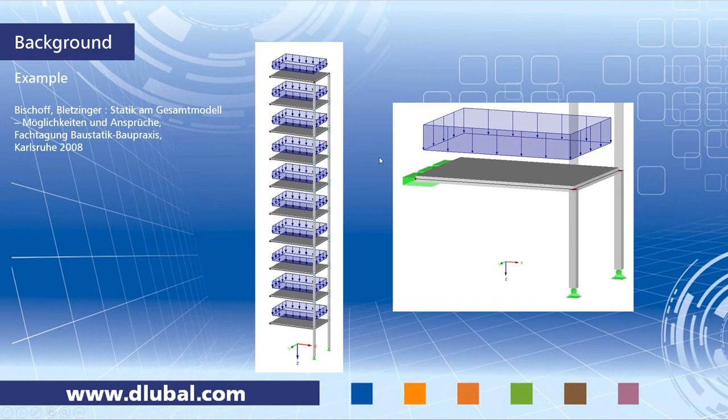So if you would calculate this model in RFEM as the whole model, it will look like the left graphic, and there you can see construction stages are not taken into account. So there's just one calculation for the whole building. All the 10 stories are calculated in just one step with all the 10 surface loads. And you can see in the graphic of deformations that the deformations are increasing to the top of the building. That means we have the minimum deformation on the bottom and a maximum on the top in the red color. And this is like a hang-up effect of the ceiling surfaces. So there's an addition of deformation from the bottom to the top, and you will find the maximum bending moment and the maximum deformation on top.

The question is: is that calculation representing the real behavior of the build-up process or the real behavior of the structure? And it is clear that the whole building, the 10 stories, are not built just in one second or one step. They will be built step by step. That means first there will be, of course, the first story, then the next one, and so on.

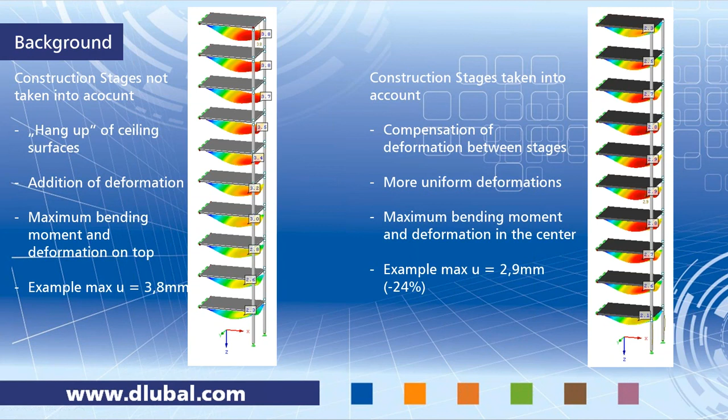What does it mean? For example, you have a temporary load like a crane or something like this in stage number 2, representing some construction workers or a construction truck maybe, and you want to inspect a combination of different positions of this load. So this is what you can do with temporary loads, and these are acting only in the stage and not in a following stage. These temporary loads are calculated by first order, and that's why you can combine them as a result combination in a particular stage.

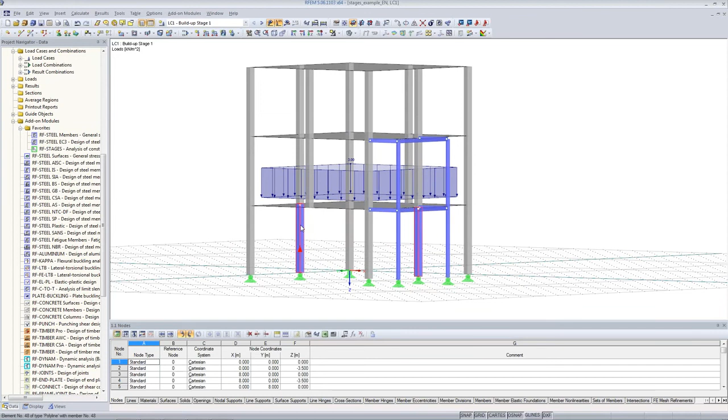So with these features, we want to move over to RFEM, and there I've already created a small model for today's webinar. We have a small building, concrete and steel. We have 3 surfaces, a lot of concrete columns over there, and we also have temporary columns over there, these two steel columns and a small temporary platform. I already created the load cases. It means we have build-up loads for stage 1, stage 2, and stage 3.

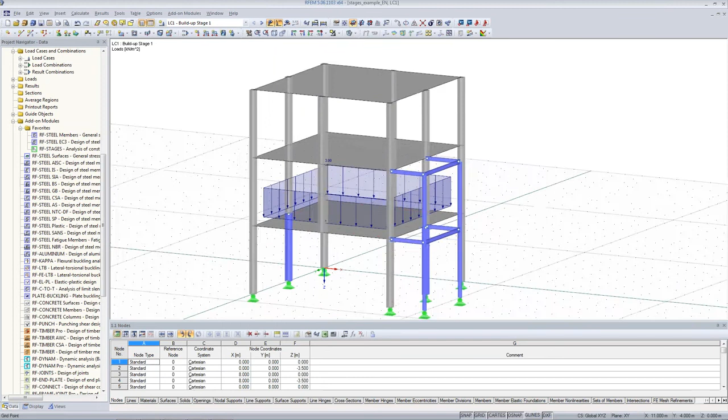And as you can see, it's an important fact that you have to split up the loads for the stages calculation. So I want to prepare 3 stages. That means the first stage, the bottom of the building, then the next stage will be added in stage 2, and then the final stage where I want to remove the temporary frame over there. And in the second stage, I will already remove these 2 temporary columns. So important is to split up the loads. This is built up for stage 1, stage 2, and stage 3.

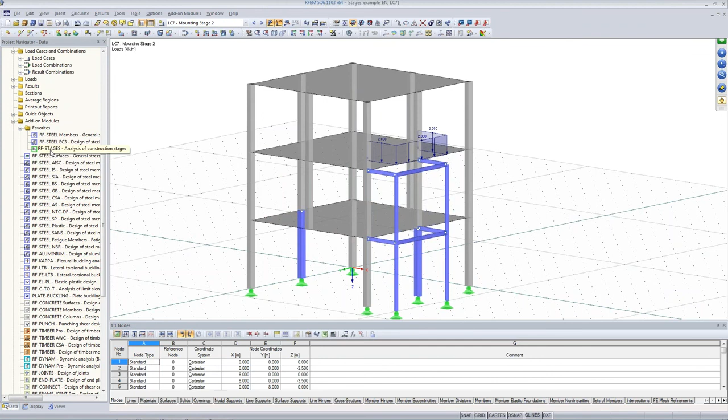And we also have mounting loads. These are the temporary loads on our platform. So right now we want to start with the module RF-Stages.

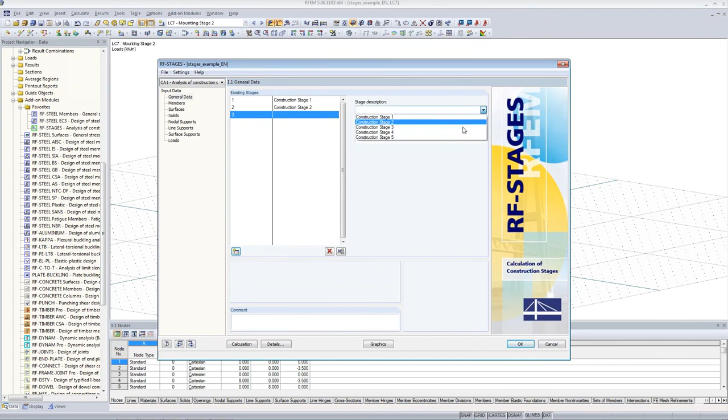By double-clicking on this module, you will find general data, and it is just about defining the stages. So we have 3 stages there. You can write down a description, or you can use a template like construction stage 1, 2, and stage 3. And then we can go on to the members dialog, where you have to add the members which will be added, removed or modified in the particular stage.

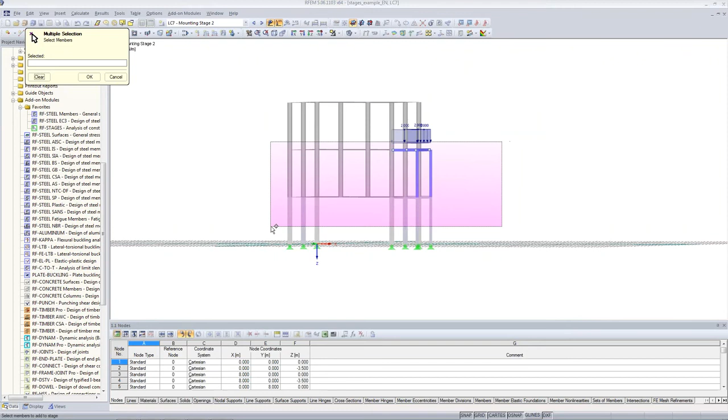In stage 1, of course, you cannot modify or remove something because there's no stage before stage 1. So we will start to add something, and these are all the columns there and the 3 horizontal steel beams. Okay. In the next stage, we want to add not these columns, but these members. Okay. And we want to remove the 2 temporary columns at the bottom of the building.

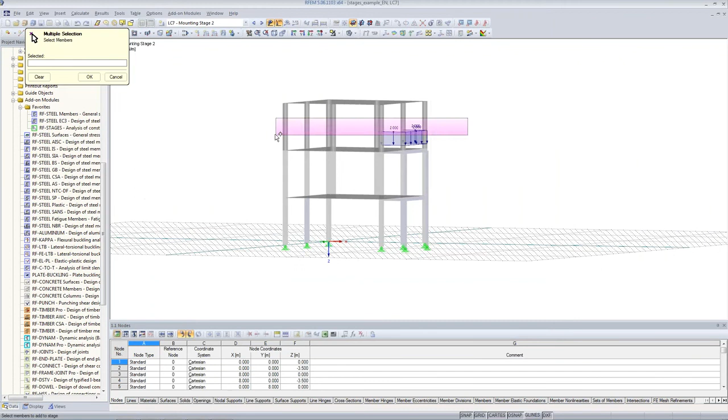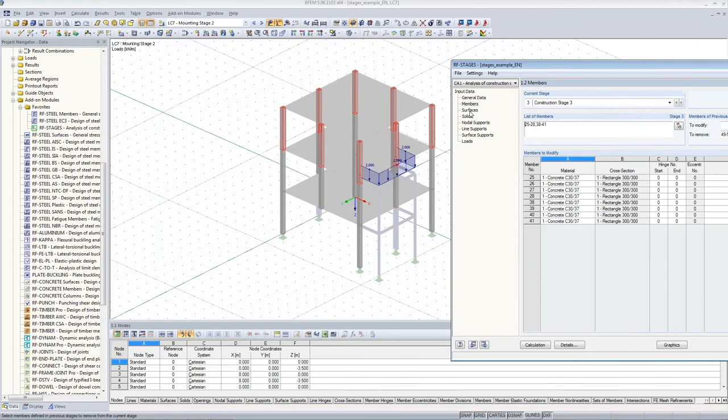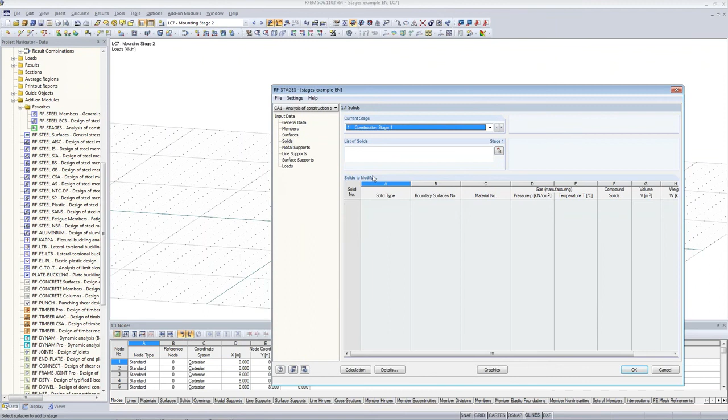Okay. And in the last stage, we build up the concrete columns in the 3rd floor and remove the temporary frame there. So as you can see in the graphic, you can follow the selection in the RFEM background. So construction stage 1, 2, and 3. Now we want to add the surfaces. That's quite easy. Stage 1, surface 1, stage 2, surface number 2. And in the last stage, there's the roof surface.

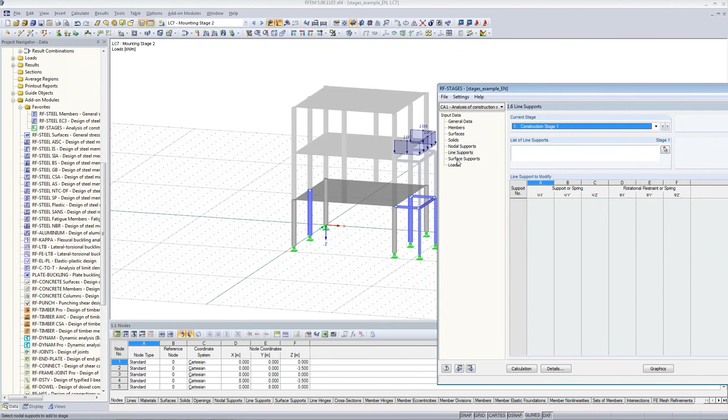Okay. We don't have any solids in this model, so we can go on to the nodal supports, and we will just select all of them. We don't have to remove the nodal supports because these temporary columns will be removed, so there will be no load left on this one, and we can just leave it as it is for all the stages. We don't have any line supports or surface supports, so we can just go on to the loads.

In RF-Stages, it is possible, as you can see in this mask, to add permanent or temporary loads. The permanent loads are, for example, self-weight, or any kind of load case or load combination which should be taken into account in every stage. So it is a constant load for all the stages, like build-up loads and live loads. In this example, I created load combinations for the several stages, and you can also use load cases or load combinations, or you can even use them together.

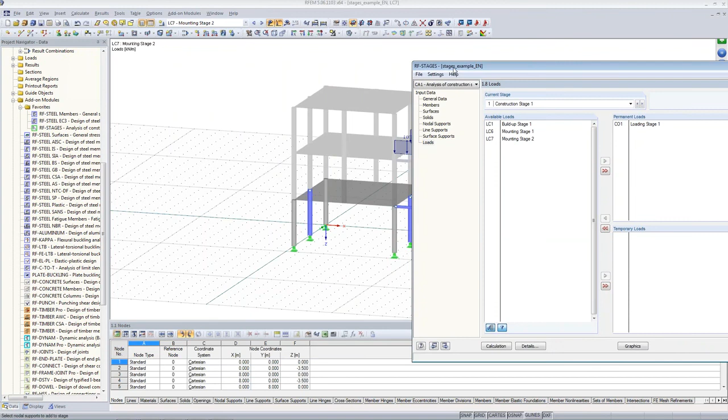So in stage 1, I prepared load combination number 1, so I can add this there. Stage 2, loading for stage 2 as a combination, and stage number 3. What about the self-weight? Self-weight is a special type of load in RF-Stages. You can add the self-weight as a separate load case for every stage. So in this example, I could create 3 load cases of self-weight, but this is quite time-consuming.

In this combination there is no self-weight active because we can use the assign self-weight to all stages checkbox there, and because I used partial safety factors in the load combinations, I want to change the self-weight factor to 1.35, for example. Okay. On the lower left side, you can find the alignment of new elements, like initial position, which is exactly the same as in RFEM, or tangential position, which is the position of a new element in relation to the last stage before, which might be more important for bridge construction.

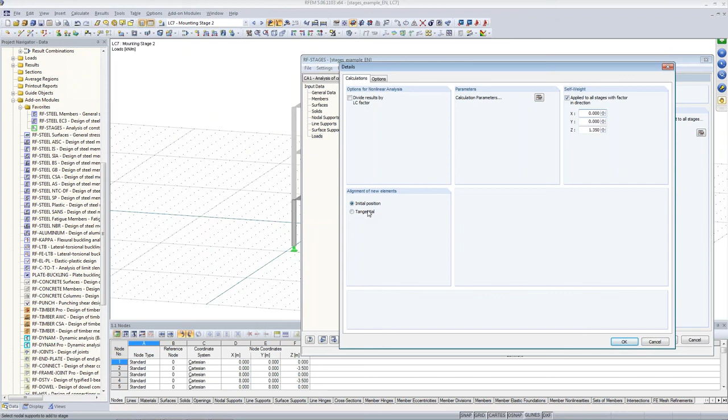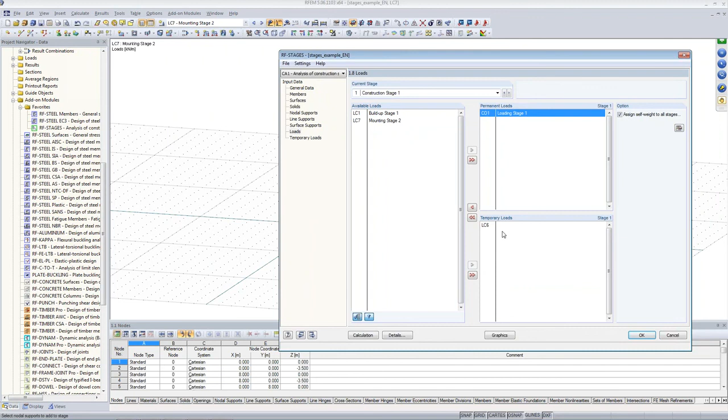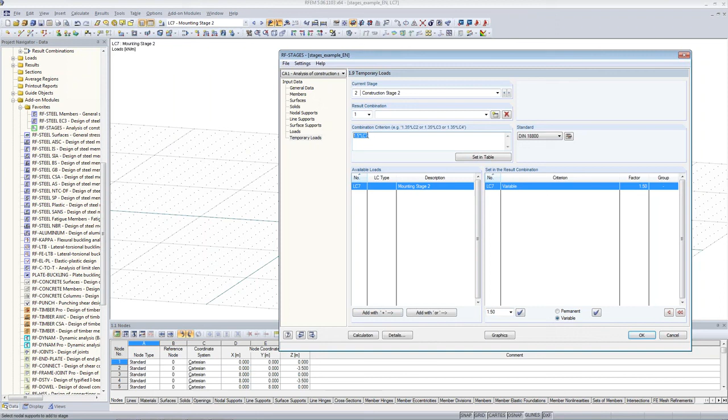Okay. What else? We have 2 mounting load cases there, and these should act only in the separate stage. So I will add load case number 6, mounting stage 1, as a temporary load case for stage 1, and mounting stage 2 as a temporary load case in the second construction stage. To combine more than one load case, you could use temporary loads, but in our example we have just one mounting load case, so I will just add it with a factor of 1.5, for example, for construction stage 1, and then the next one for stage 2 also with a factor of 1.5, load case 7.

And with these definitions, we can start the calculation. And you can see that there's a separate calculation for each construction stage.

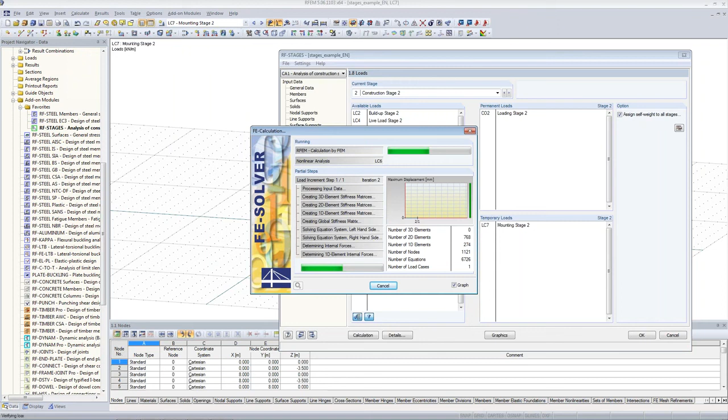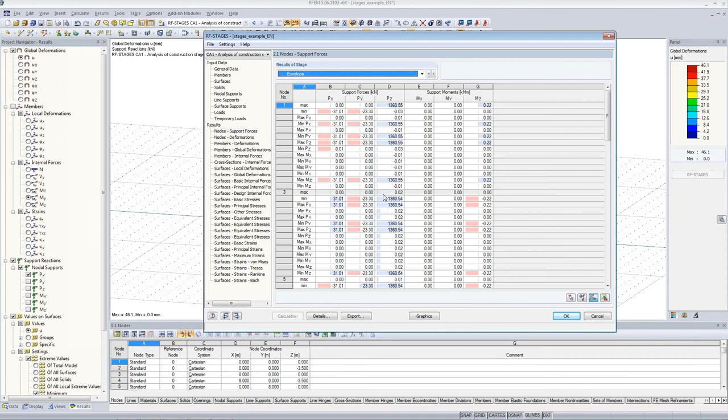And after that, all these results are combined together as an envelope of all construction stages. So you can check the results like in RFEM in several tables, results, Nodal Supports, for example. Construction stage 1, you can check the temporary load cases and an envelope of all the construction stages, including temporary construction stages.

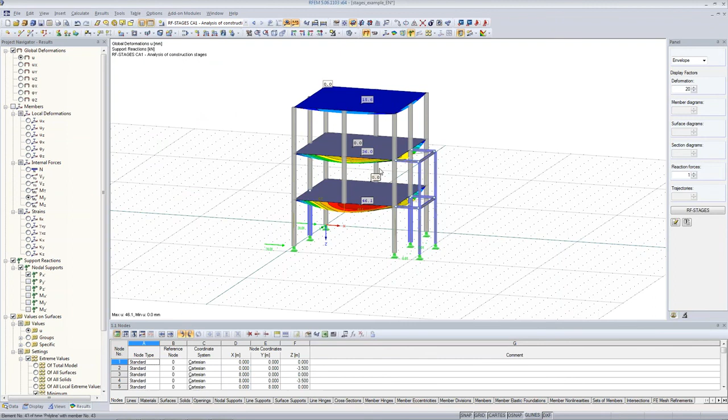So right now I could do just nothing with these results. I can do no design because they are just in the module, and to export them to RFEM, you can easily click on the export button, exit the module, and you will get result combinations in RFEM. Right now we can just stay in the module and check the results in the graphic.

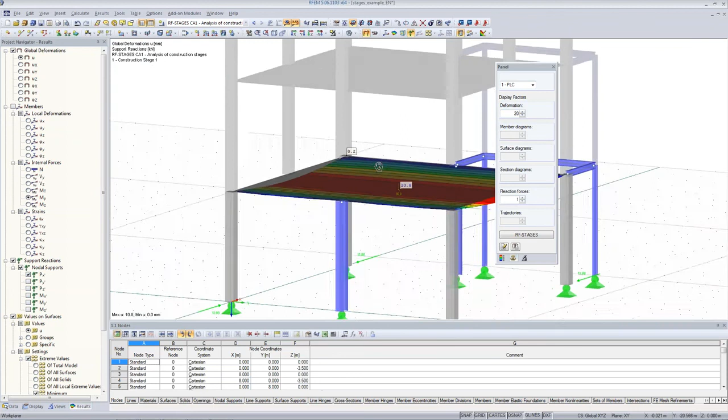So on the right side you'll find a panel with the envelope, or you can take a look at one PLC, which is the permanent load case, permanent loads for stage 1. We can take a closer look to the structure over there, and you can see that there was a temporary steel column, and there are no deformations over there. In the next stage, this column is removed. It's in the background right now. You cannot select anything, and you can see a deformation which is on the ceiling in the second stage.

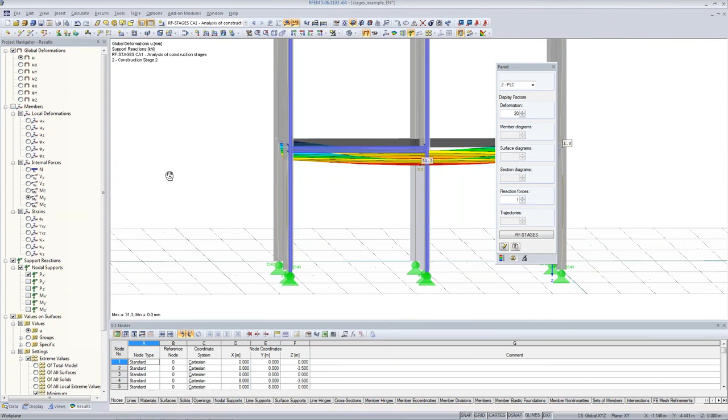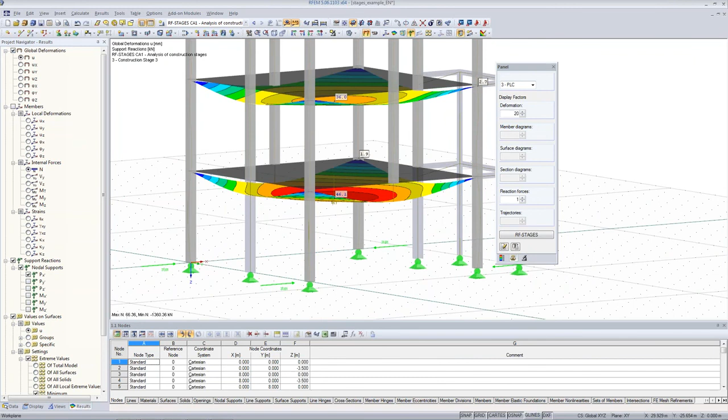You can check the normal forces in the temporary frame over there, and in the third stage you can see that also this frame is in the background. It's grayed out, so there's nothing. It's removed in the last stage, and this is like the final result or final stage. Yeah.

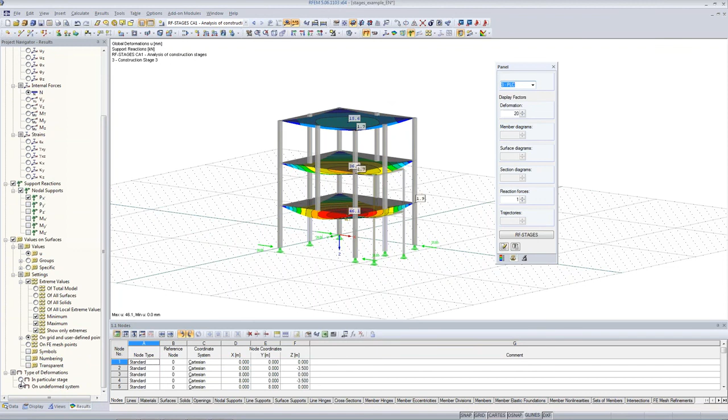I also talked about a feature to show the type of deformation, that means an undeformed system or in the particular stage. So if I want to know what size of deformation is in the last stage in the structure, I can change this option to in particular stage, and you can see that in the last stage you get an additional deformation of 15.6 millimeters on the structure,

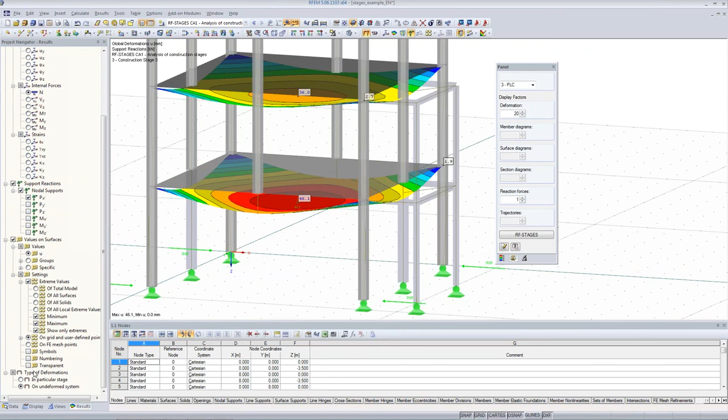and on undeformed system it's 46.1 for the first floor. That means the total deformation of this surface is about 5 centimeters, but in the particular stage, in the last stage, it is just 15 millimeters.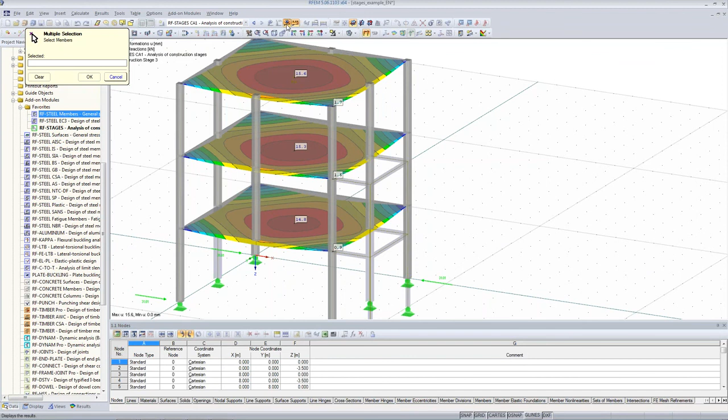All right. Right now I can do a small design with these result combinations of RF-STAGES, for example, in steel members module. And you can use these combinations over there, or you can just use the envelope to get a small elastic stress design, for example, for these columns. First of all, I have to switch off the partial view mode to get these columns working. Cancel. Okay. Incorrect.

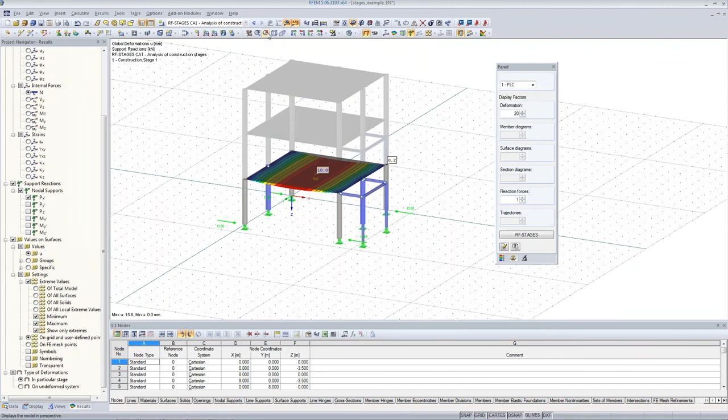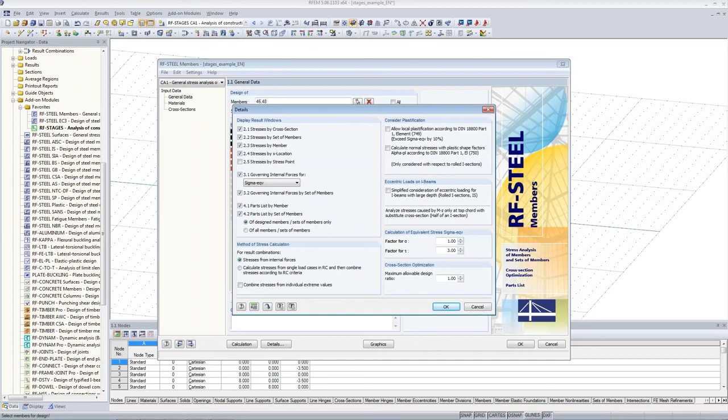So this is stages. Okay, now I can use it in RF-STEEL Members module, and I can add these columns for design. For example, these two temporary columns, and I want to check the envelope of all the construction stages on these columns. Therefore, I will change the method of stress calculation for result combinations to stresses from internal forces and run the small design, and it's just about 7%.

Okay, with this small example, I want to close the presentation, and I will hand over to my colleague, Gerlin Schubert, for some additional information for you.